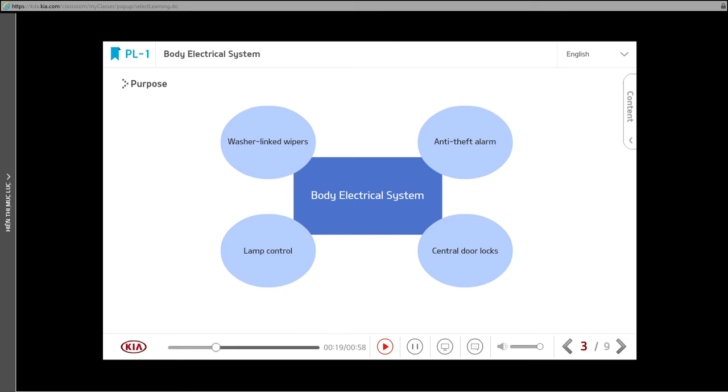The body electrical system controls a variety of convenience functions as a single system. The system controls the washer-linked wipers, anti-theft alarm, lamps, central door locks, and other functions. So, why do we need body electrical systems?

As civilization develops and the economy grows, vehicles are becoming increasingly important in our lives. Vehicles are now a daily necessity for most, and further technological developments have made vehicles even more convenient and comfortable. This progress has led to the development of various body electrical systems, which now control a number of interrelated units quicker and more precisely.

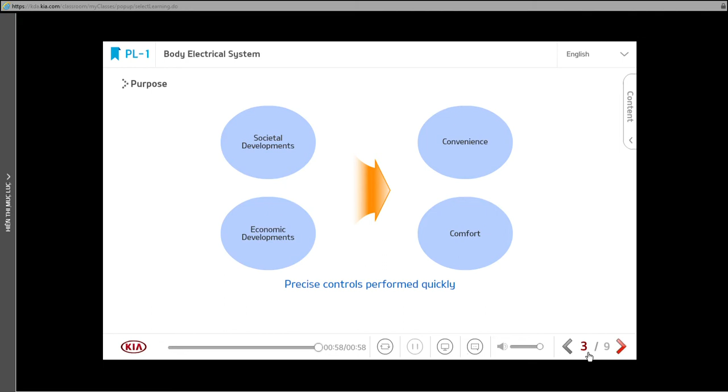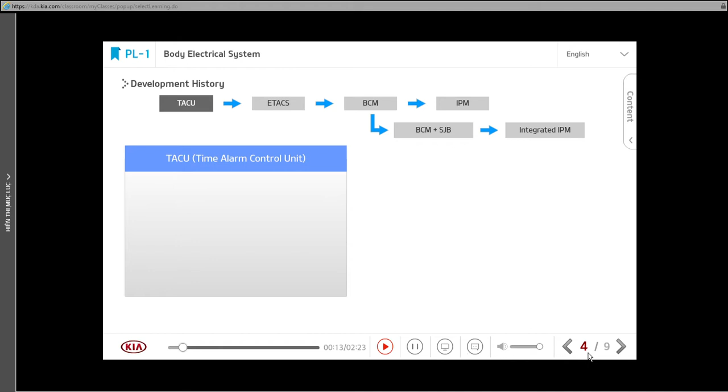Now let's look at how body electrical systems have evolved. The first body electrical system was the time alarm control unit. This system only controlled timer and alarm functions, such as the rear windshield defogger timer and power window timer.

The next system was the electronic time alarm control system, which offered more functions than the time alarm control unit. In this system, a single computer unit controlled the function of each relay, actuator, and motor.

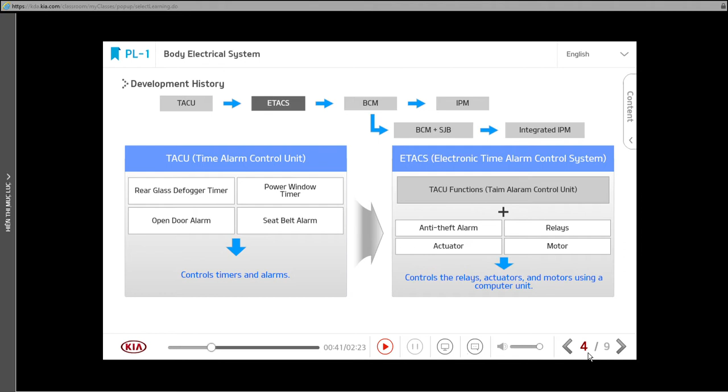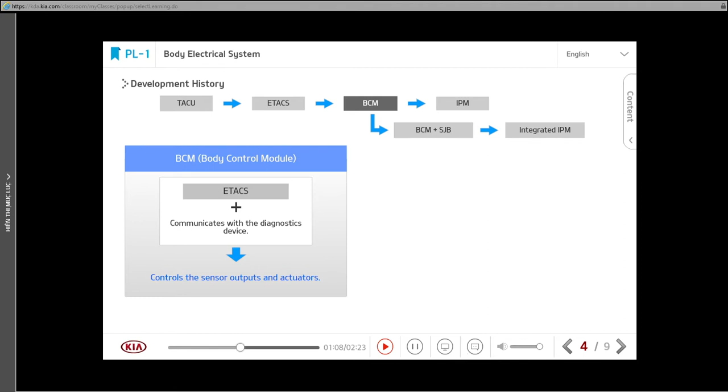The body control module system eventually followed the electronic time alarm control system. The difference between the two is that the body control module can communicate with diagnostics devices. Vehicle models may differ slightly, but, in general, body control module systems provide the sensor output mode and actuator force drive mode via the diagnostics device.

After the body control module, the intelligent integrated platform module began to be applied to vehicles. This provides more functions than the body control module because it connects more units to the CAN communication system, and it also supports error codes for diagnostics.

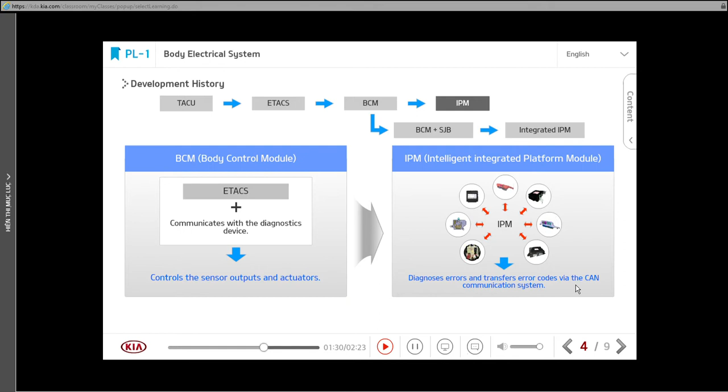Some vehicles that communicate via the CAN communication system are equipped with a body control module. Because the body control module supports an increasing number of functions, many vehicles now include a smart junction box to control some systems. The smart junction box module uses a conventional junction box to implement communication control and diagnostic functions. It also supports error codes.

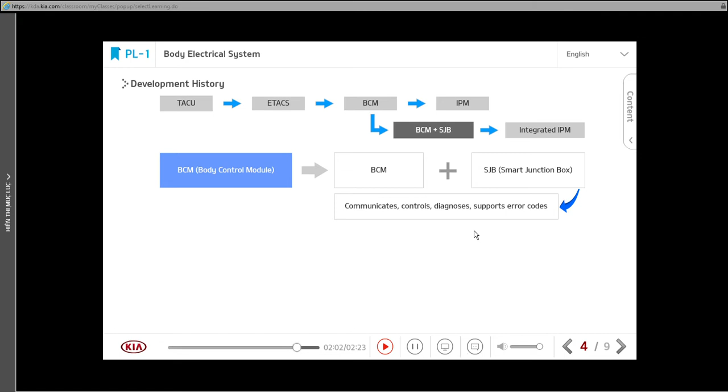Recent systems use an integrated IPM that combines the intelligent integrated platform module and the smart junction box into one unit that can control the entire body electrical system. We will discuss this integrated IPM in the next session.

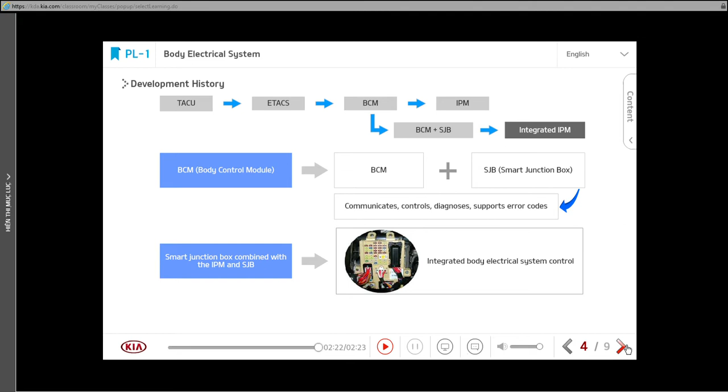The body electrical system is composed of the body control module, a smart junction box, and various switches. The system is controlled in the following way.

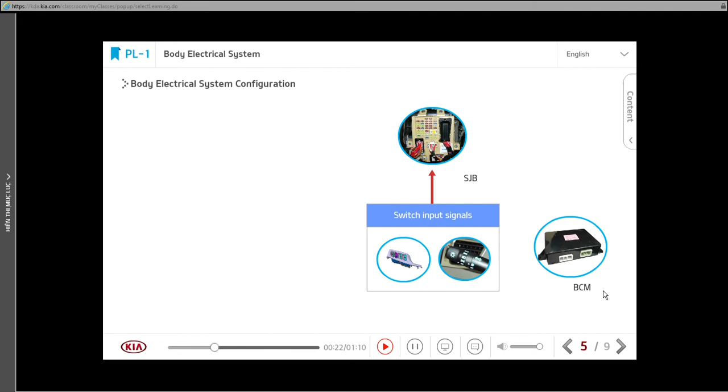First, the smart junction box receives signals from various switches and sends these signals to the body control module via the CAN communication system. Then, the body control module combines the data received from the smart junction box with its own data, and issues output commands to the smart junction box.

Based on these commands, the smart junction box controls the relevant relays and supplies power via IPSs. In other words, the smart junction box receives signals from switches, but doesn't control the system directly. Instead, it forwards the signals to the body control module, and receives commands from the body control module to control the system.

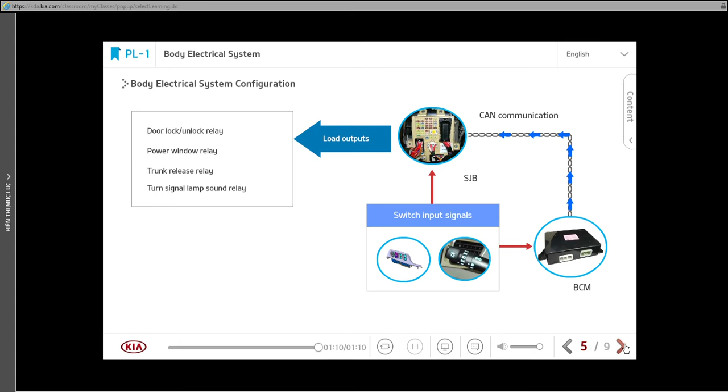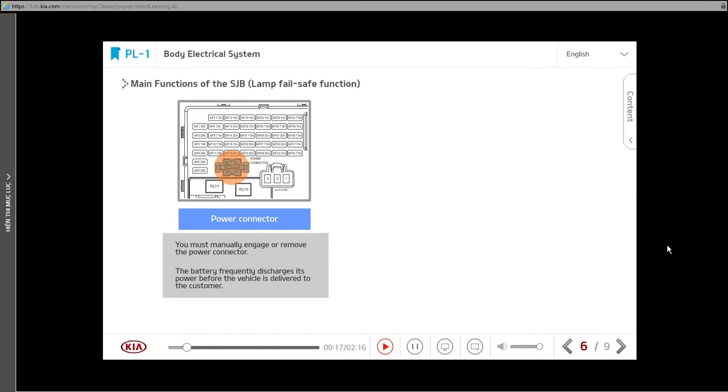The power connector was originally installed inside the smart junction box to cut off parasitic current. However, it had to be inserted or removed manually, and its battery frequently discharged before the vehicle was delivered to the customer. To eliminate this inconvenience, the mode selection switch and auto cutoff relay control system were applied to monitor the condition of the vehicle and automatically cut off the parasitic current.

If there is no switch change, or CAN communication sleep mode for 20 minutes, then the auto cutoff relay automatically stops the current. But, if ARM mode is activated after the vehicle is delivered to the customer, the auto cutoff relay automatically stops the current after approximately 60 seconds.

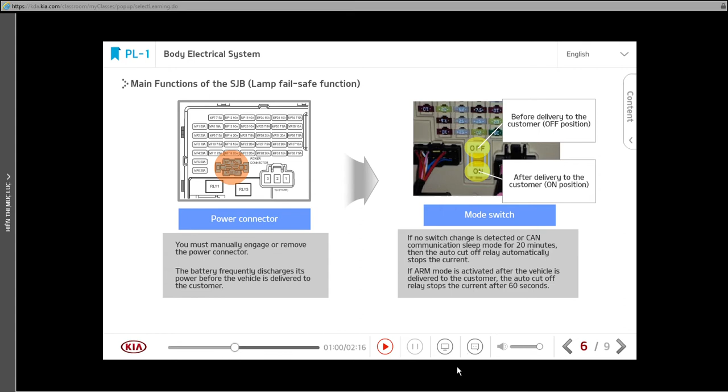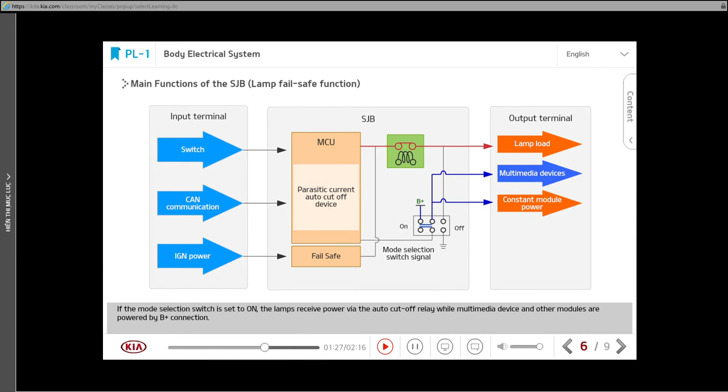The parasitic current auto cutoff device functions in the following way. When the mode selection switch is off, the lamp load, multimedia devices, and various modules receive a constant supply of power via the auto cutoff relay. If the mode selection switch is set to on, the lamps receive power via the auto cutoff relay while multimedia devices and other modules are powered by B+ connection.

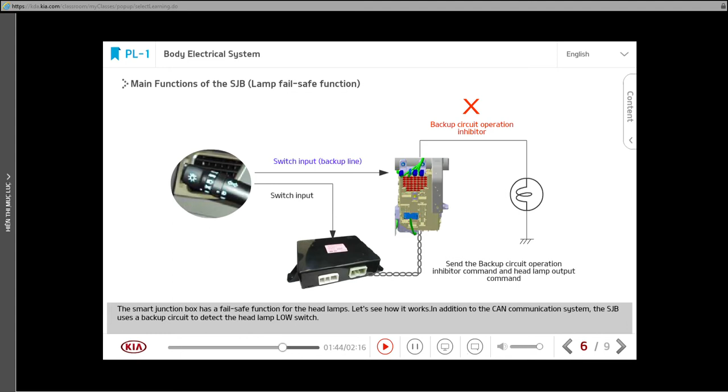The smart junction box has a fail-safe function for the headlamps. Let's see how it works. In addition to the CAN communication system, the smart junction box uses a backup circuit to detect the headlamp low switch.

If the controller is normal when the ignition is on, the Smart Junction Box sends an inhibitor signal through the backup circuit to prohibit its operation. If the controller fails or the CAN communication system has a problem, this system cannot output an inhibitor signal. If this occurs, the backup circuit activates the headlamps and tail lamps when the headlamp low switch signal is input.

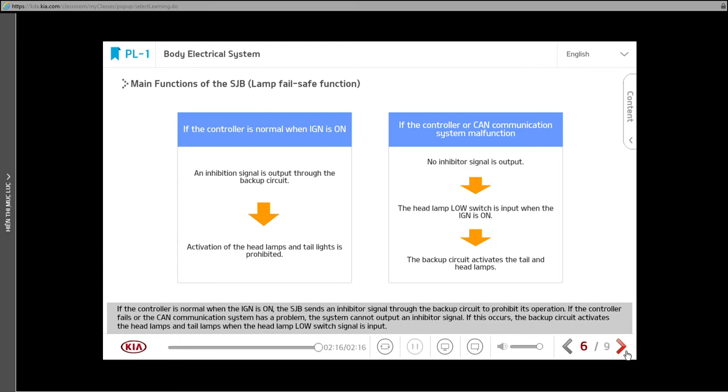The operating principles of body electrical systems can be divided into the input and output control mechanisms. First, with pull-up inputs, the unit's constant voltage regulator outputs 5 voltage, and the resistance causes a current of several milliampere to flow. When the switch turns on, the voltage falls to 0 voltage, and this indicates the position of the switch to the module.

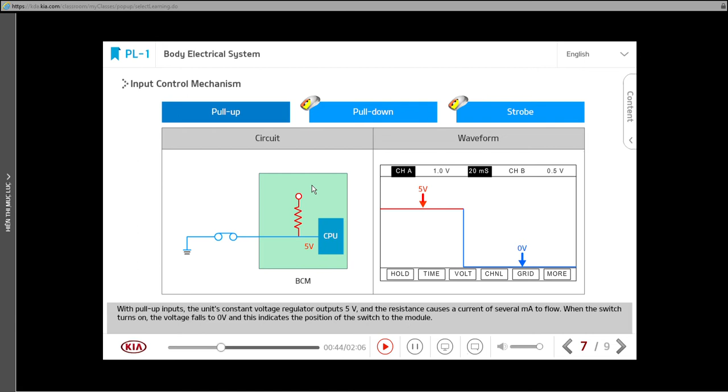With pull-down inputs, the module determines the switch position based on the 12 voltage input.

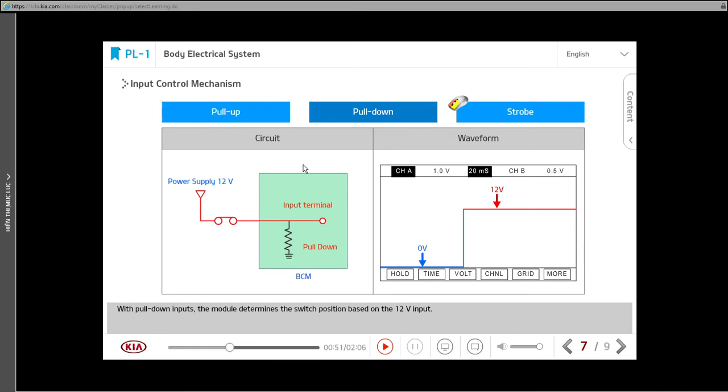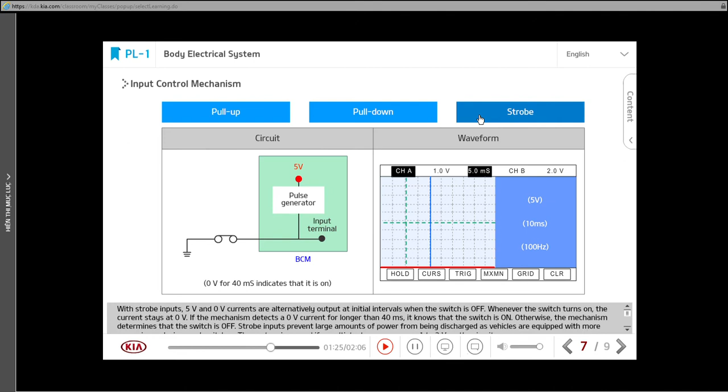With strobe inputs, 5 voltage and 0 voltage currents are alternatively output at initial intervals when the switch is off. Whenever the switch turns on, the current stays at 0 voltage. If the mechanism detects a 0 voltage current for longer than 40 milliseconds, it knows that the switch is on. Otherwise, the mechanism determines that the switch is off. Strobe inputs prevent large amounts of power from being discharged, as vehicles are equipped with more convenience devices and switches. The system is normal if a multi-tester can measure 1 to 2 voltage on the circuit.

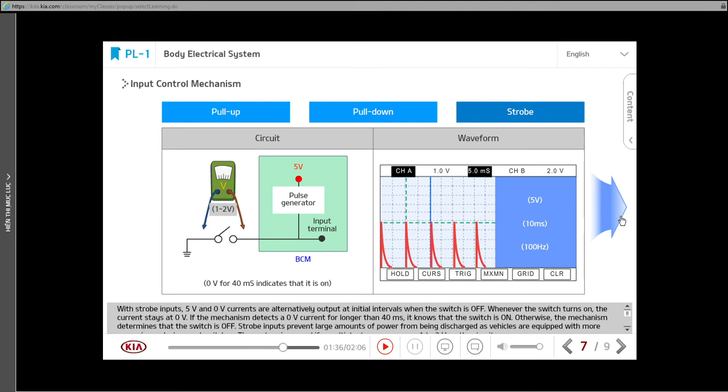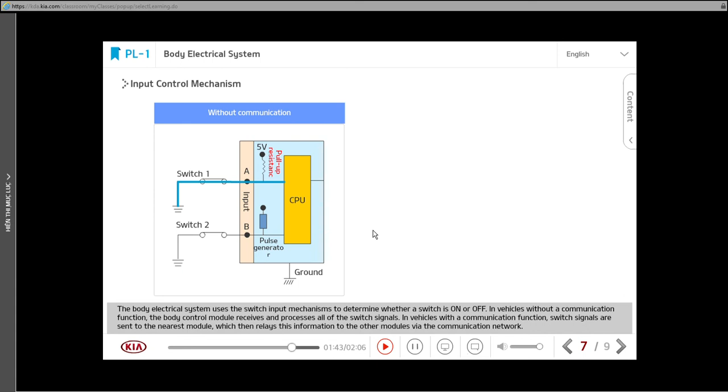The body electrical system uses the switch input mechanisms to determine whether a switch is on or off. In vehicles without a communication function, the body control module receives and processes all of the switch signals. In vehicles with a communication function, switch signals are sent to the nearest module, which then relays this information to the other modules via the communication network.

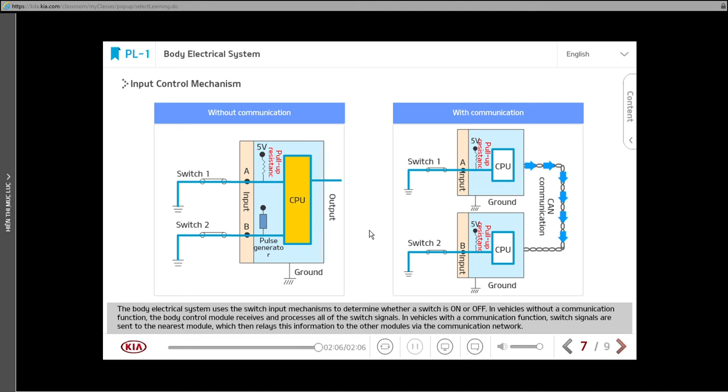Now let's look at the output control mechanism. For output control, the system uses a transistor to control small currents that activate the relay coils and allow large currents to flow through. When the activation conditions for the electrical loads are satisfied, the module turns on the internal transistor to activate the relays.

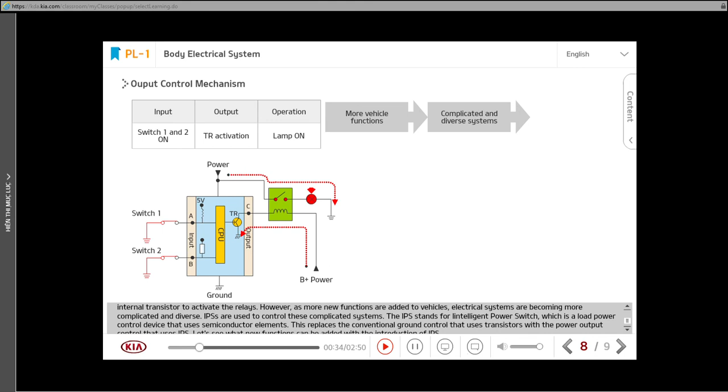However, as more new functions are added to vehicles, electrical systems are becoming more complicated and diverse. Intelligent power switching devices are used to control these complicated systems. The IPS stands for Intelligent Power Switch, which is a load power control device that uses semiconductor elements. This replaces the conventional ground control that uses transistors, with the power output control that uses Intelligent Power Switching Device. Let's see what new functions can be added with the introduction of Intelligent Power Switching Device.

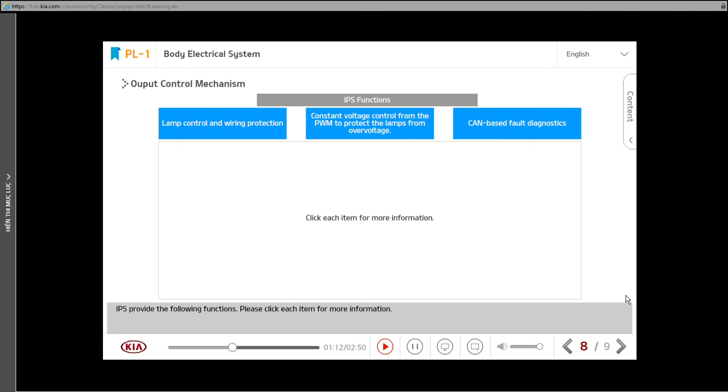IPSs provide the following functions. Please click each item for more information.

Intelligent Power Switching Devices are load control devices that use semiconductors. Intelligent Power Switching Device use a semiconductor rather than a fuse or relay to control the power supply. They also detect open circuits and short circuits by sensing the current and perform self-diagnostics and fault reporting functions. In addition to this, they can switch quicker because they use semiconductors. Finally, they are compact and easy to upgrade.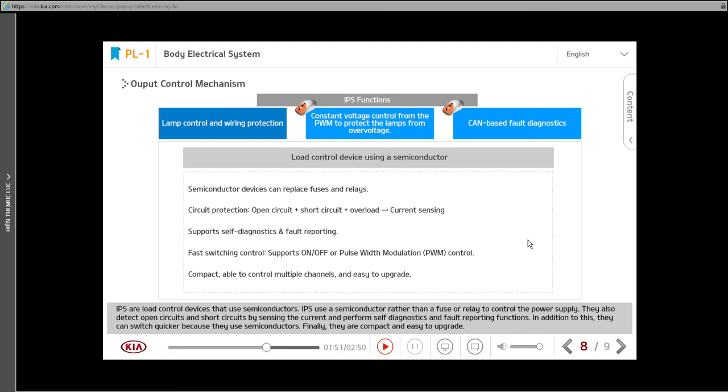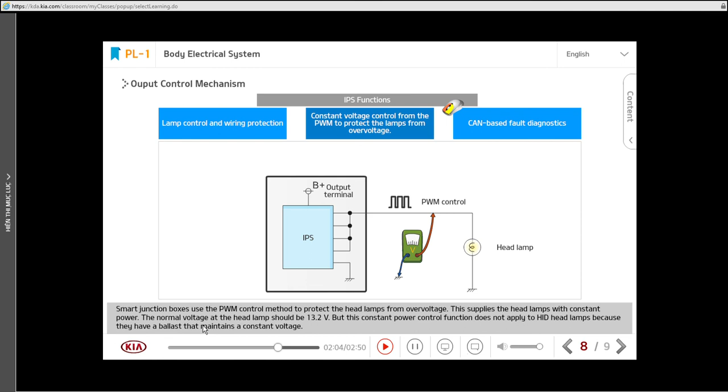Smart junction boxes use the PWM control method to protect the headlamps from overvoltage. This supplies the headlamps with constant power. The normal voltage at the headlamp should be 13.2 voltage. But this constant power control function does not apply to HID headlamps because they have a ballast that maintains a constant voltage.

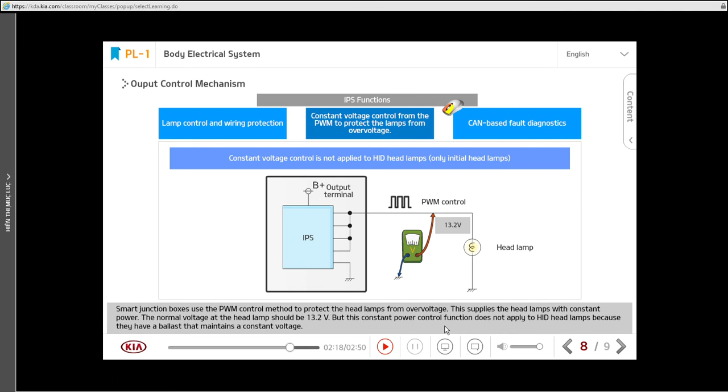The Smart Junction Box uses IPS, or Intelligent Power Switching Device, to control the outputs of the exterior lamps and detect possible open or short circuits. If the current flowing through a circuit exceeds 200% of the normal current, the Smart Junction Box identifies it as a short circuit. This applies to all the lamp types. For open circuits, however, the Smart Junction Box only checks the turn signal lamps for rapid blinking, and then outputs the error codes if necessary.